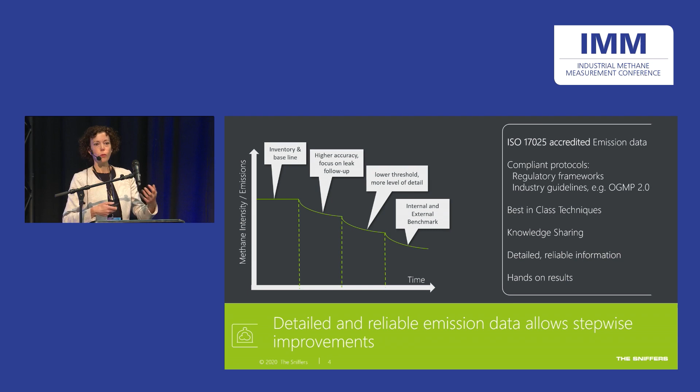And that's also what we see: when companies start to let go, emissions go up again instead of down. So we keep driving results by adding new technologies to the mix, looking for higher accuracy, lowering repair thresholds, and in the end what we also see is that benchmarking and comparing results typically drives long-term results.

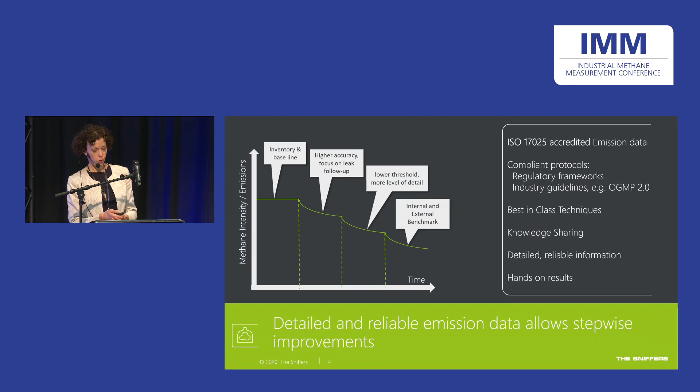So how do we achieve that? I've identified 7 key success factors in long-term results, which means first of all focus on regulations and industry standards that are there.

Luckily, more and more standards and regulations are being developed. So we built a leak detection and repair protocol, a multi-year plan that we incorporate in software. Company targets are incorporated, and we build a plan based on that. Then, as mentioned, the inventory of sources.

Build a measurement scope, meaning defining in detail every year what you are going to measure and when, taking into consideration stops and turnarounds. It's really one program that ticks multiple boxes, but it has to fit. We also see better results if you combine measurement technologies - I'll come back to that later.

And then, of course, it's people. Have dedicated people to perform those measurements and process the results. It's not a side job - if you are committed to reducing emissions, it is really a day-to-day job and you need to focus on it.

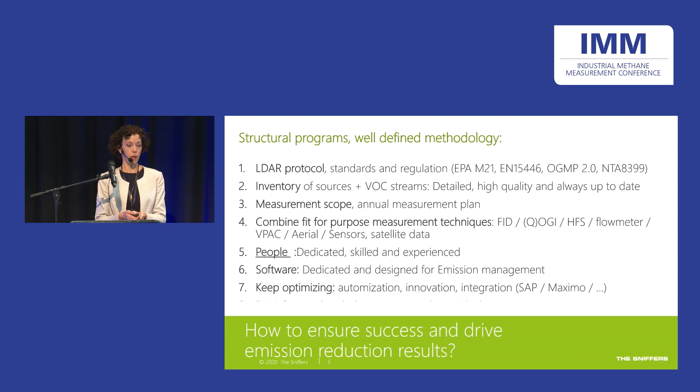And then it's keep optimizing. Emission reduction is not a project, it's not even a program, it's a process. You need to understand it's a multi-year process that you keep improving over time as technologies develop, as software develops, as you integrate more information from different systems, all with one purpose: emission reduction.

So, three basic steps. I'd like to focus now a little bit on the fugitive emission side, but basically these three steps apply to any emission type. The approach is the same.

That means attention in that first preparation phase: identify the sources. We do that by identifying the applicable process streams on the technical drawings, the P&IDs, and building that database with an overview but drill-down capability on a source level. That means each individual component - flange, connection, valve, seal - has its own identity and properties in a database.

Second, the measurements in the field. You choose fit-for-purpose technologies. It doesn't really matter which emission type you measure - vents, flaring, incomplete combustion, or leaks, fugitives - you choose measurement devices that give you the right sensitivity and accuracy you're looking for, based on company targets, protocols, and regulations.

And then lastly, it's of course the result. Make sure the reporting you do is based on measurements and not on general leak rates, because then the results of your efforts in the field are never visible.

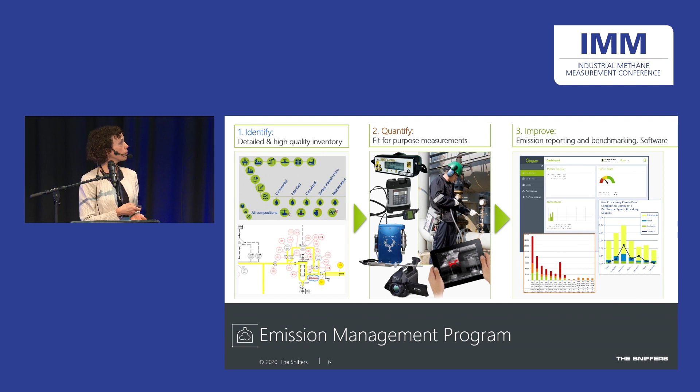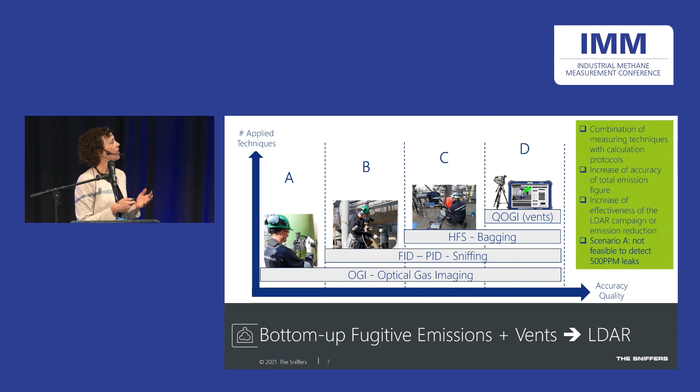So how do we select those equipments, those measurement technologies? What I'd like to demonstrate here - my slide wasn't long enough, I can add an E, F, G, H and go on - the message is it's okay to start out with one technology.

For example, an optical gas imaging camera - you screen and you find leaks, but you're also missing leaks and not finding everything. It's only applicable in certain circumstances.

And if you add other technologies, not just for quantification but also for leak detection - so if you use a camera for leak detection but use another quantification device afterwards, you're still not finding all the leaks. You really need to focus on both leak detection sensitivity and quantification accuracy. Those two things are important.

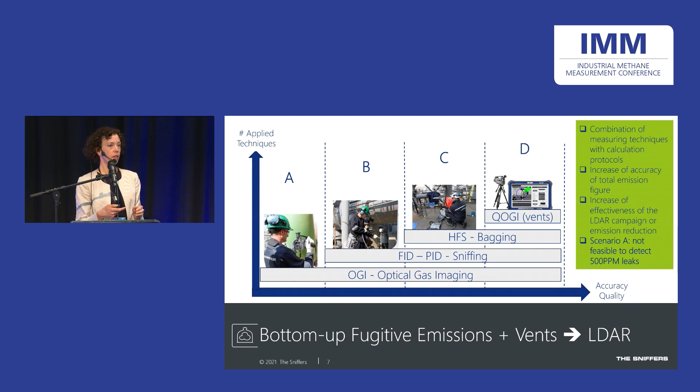I stopped here at D, but there's also aerial-based measurements, fixed sensor technologies, all newer technologies that are not yet processed in the industry protocols and regulations that are there, but they're out there and improving every day. So definitely take those into consideration.

I'd like to focus now on emission calculation based on source measurements. These are the most applied techniques right now for leak detection and repair programs: FID measurements, and we have EPA Method 21, or in Europe the EN 15446 standard, to convert ppm values found in the field into a mass loss in kilogram per year. We do that using factors.

Even with optical gas imaging - if you use a camera, it's not a measurement at all, it's only visible whether a source leaks or doesn't leak - but you can still perform an emission calculation. Initially this is okay, but you also need to understand that your calculation is very inaccurate and that you're also missing leaks. That is the main point.

What we see in our experience is that all of these factors that the industry uses worldwide were not developed for methane, not at all. So we see that they give a large overestimation of fugitive leaks. What we feel the industry needs is a new development of methane-specific correlation factors.

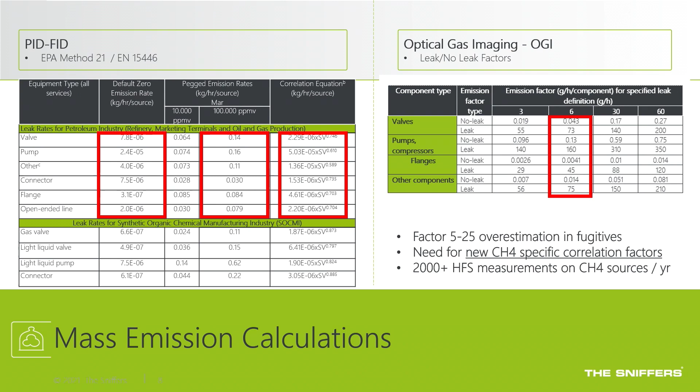Because let's face it, in the field you keep measuring ppms and screening with OGI cameras, but the factors don't match the actual results. And how do we measure the accurate results? With high-flow sampling - we perform thousands of high-flow sampling measurements every year. So we see these deviations, and I'd like to share.

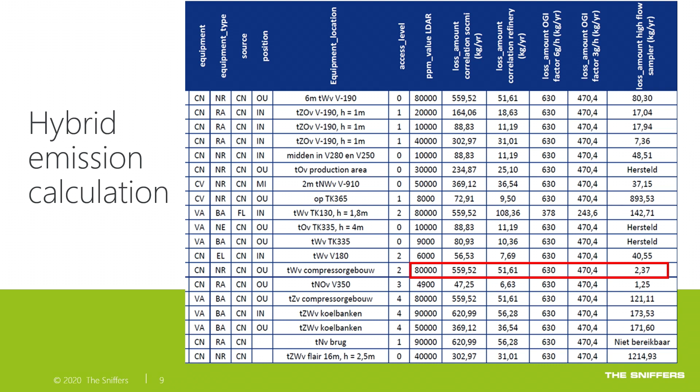These are some typical results where I have indicated the losses calculated with the factors, and in the last column, the actual loss that we measured with bagging the leak, which means measuring directly what's coming out of a leak. You see here the big differences. These are not really exceptions. In 85% of the cases, it's an overestimation between a factor 5 and 25 in the end result. So definitely something to consider.

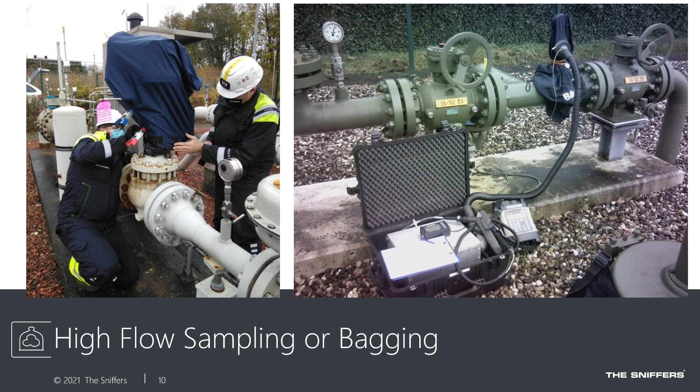Here you see some examples of what the bagging looks like. So you actually wrap an equipment, measure the flow and concentration, and you know the molecular mass, temperature, and you calculate the actual loss.

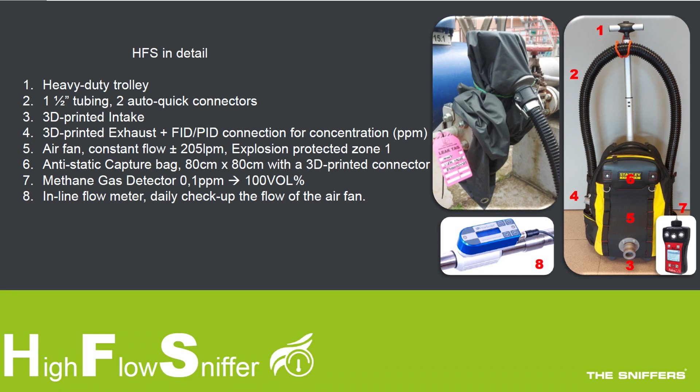So for that purpose, we have built our own high-flow sampler. The original one was developed in the early 80s or 90s, a long time ago when I was young, and the device was discontinued. Right now there are several of these new bagging devices on the market. We really needed them, so we decided a couple of years back to build our own. It's based on more modern technology, so connectivity with software, again having an audit trail so that you can trace back every measurement to the original source.

How do we build a measurement scope and a measurement plan? How do we mix those technologies and make sure that we know what we are going to measure every year? So this is an example of what we've been doing a lot in the past years.

Initially we start out with 100% inventory of sources. And an inventory is not an inventory - it can be done in 100 different ways with a lot of granularity and eye for detail, incorporating properties of each source, even the brand of a valve, to monitor performance over time, etc. You can do this in many ways, in the field, but also based on the P&IDs, on the technical drawings. And depending on how up-to-date all the information is, that also defines how accurate and up-to-date your database will be.

Sometimes in parts of the world, technical drawings are not even available, so you need to go in the field and take pictures of each equipment and add numbers. It can be a lot of work, but it's also something that we've optimized and automated, so it can be fairly quick and accurate at the same time, depending on the information that's available.

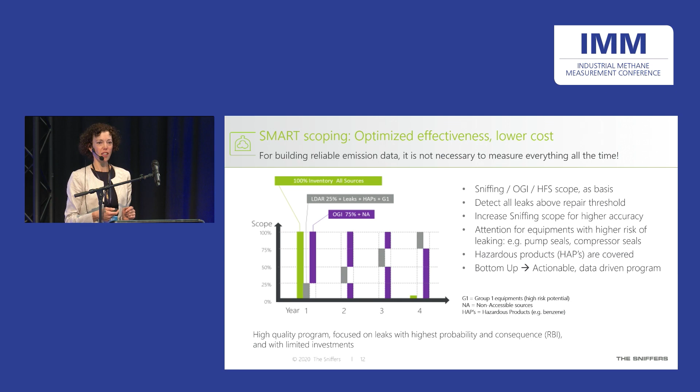If it's a big installation, you can divide the installation in units. But in our gas transporting and distribution network, we also have thousands of small installations. There we measure a part of the installations and we develop a specific emission factor, for example for a typical kind of well site or a typical kind of valve station or metering station, and we extrapolate those results over the parts that we don't measure, but screen with the camera. So in that way, we develop a multi-year plan.

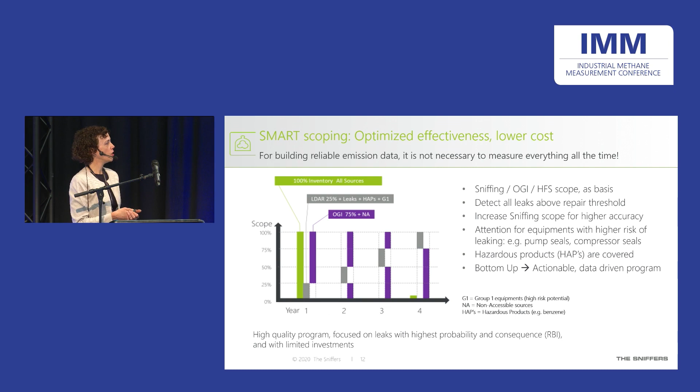To manage all that, we have developed a software, grown over the past years. We started out with software to manage our own data as a service provider, and right now it's a tool that we also offer to companies to manage all emissions - not only fugitives, but because you can calculate emissions based on factors, direct measurements, indirect measurements, source-based and site level, you can build your total emission number based on this hybrid calculation. It's also a tool to track leaks, monitor targets, and have more detailed insight.

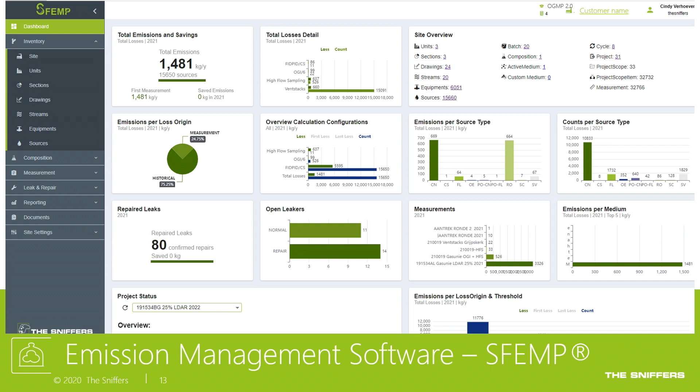I see my time is up, so that's basically all I wanted to share with you. And I believe a question session is after 4 speakers. Thank you.

Right, how are we on audio, folks? Good stuff. Oh, we've jumped on several slides already. Oh right, you get the sneak preview. There we go, okay.

The rate of change in this subject is quite remarkable. If you look at where we were the last time this conference met face to face, the topic of conversation was really, why should we reconcile methane data? In the time it's taken us to have one small pandemic, we've gone from why should we be reconciling data and doing this extra work into how can we take these measurements and technologies that fulfill this part of industry expectation and regulatory requirements, into what is actually the important thing, which is what is this data telling us and what can we do with it?

Because when we're talking about reconciliation, yes, it is important that we are taking these measurements to improve the quality of what we report, be it to our regulators or other stakeholders. But it's more important than that. The question is not just the quality of the reporting, but how can we use that information to manage our emissions more effectively, and in the case of methane, bring those emissions down. And...

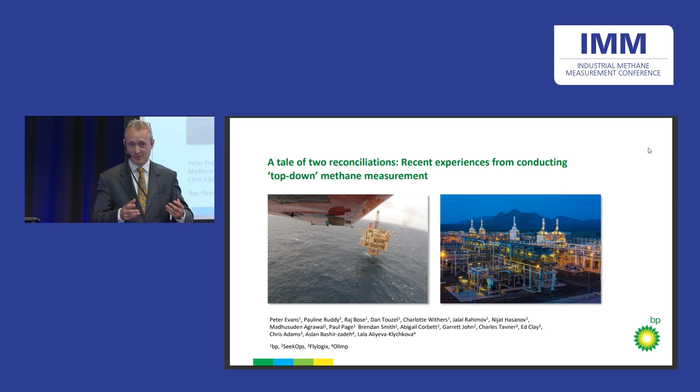In that spirit of transparency, what I'd like to do is present two quite different results from two of BP's operated assets, about as different as you can get among the ones we own and operate. One is Clair Phase 1, to the west of Shetland in the cold, dark waters of the North Sea, offshore of course. The second is a large gas processing site called Sangachal, on the banks of the Caspian in Azerbaijan, managing the sum total of all the oil and gas BP produces in the Caspian and exporting that into Europe. In the climate we live in, this is one of the main arterial routes of gas into Europe, so the emissions from these facilities really matter, and managing these facilities really matters.

For the purposes of reconciliation, these are single standalone units. They can be considered as populations of one, and we need to reconcile them at the individual asset level. That reconciliation is only as good as the reported data that goes into that level 4 measurement in the first instance. We start with understanding what is actually coming from these facilities. If you look at the emissions as we understand them today, the vast majority of methane escaping to atmosphere is actually coming from processes - from flares, and from combustion sources. For these sites, the fugitive emissions are a relatively small percentage.

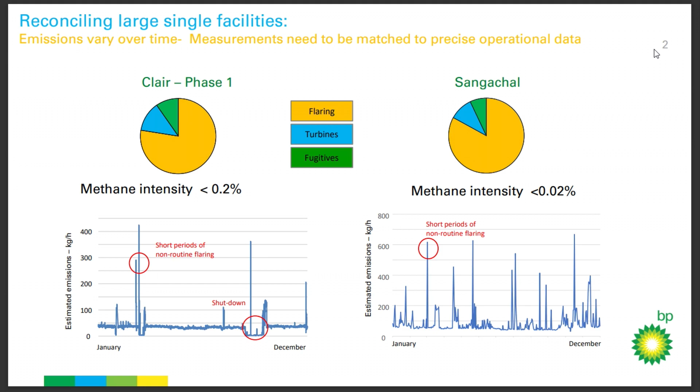That matters because when you look at what happens on these sites, the emissions change by orders of magnitude over the course of the year. If a piece of equipment suddenly trips and you go into a flaring situation, the emissions can be 10, 100 times larger than at steady state. What is also interesting is when you look at the split of these emissions - these are very different facilities, but the relative proportions are roughly the same. The methane intensity, though, is quite different - there's an order of magnitude difference between Clair, which is mostly an oil-producing facility and doesn't produce much gas, and Sangachal, which is predominantly a gas-producing facility. So when we're talking about methane intensity as well, these are very different sites in terms of the total amount of methane passing through them.

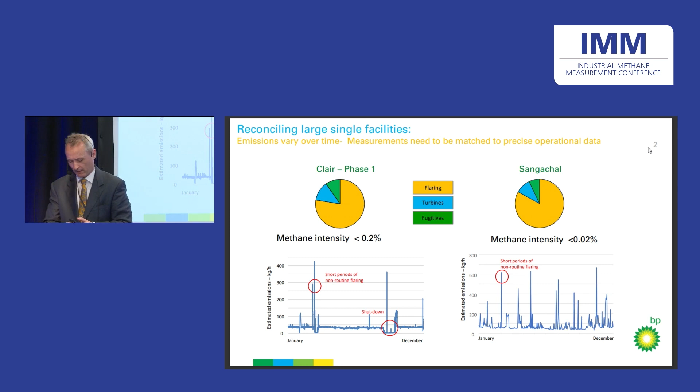So how are we taking these actual measurements? Well, Stefan Schwietzke yesterday gave an insight into part of this technology, and colleagues from SeekOps will be talking about some of this later on today as well, that in an offshore setting, the principal technique we are deploying is putting a spectrometer on an autonomous aircraft. I don't like calling them drones because they're a little bit more intelligent than that. They're managing their own flight path and managing their orbits around the facility.

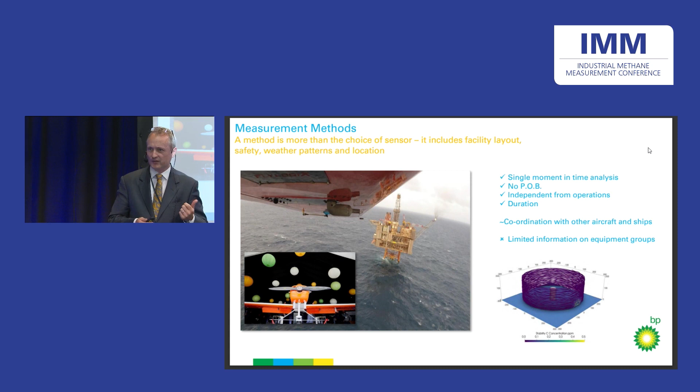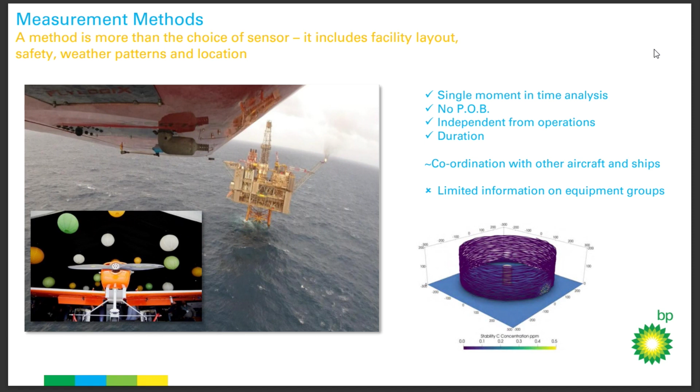The benefit of this kind of technology is twofold. From an operator's point of view, we're not putting a person on board, we're not sending people out in aircraft routinely, and we are limiting the number of people transiting between sites. So from an operational point of view, there are advantages. But also from a data management point of view and a reconciliation question, it is increasing the independence - that measurement is not being conducted in close communication with the asset. It's being managed independently of what's happening on that site at the time. The downside is you have reduced levels of spatial resolution because you're taking everything from the facility simultaneously.

Onshore is a different situation. These are much bigger sites. Sangachal is about 2 kilometers long. And that's compounded by the fact that the site has very complex wind patterns, where you've got the Caspian to one side, mountains to the other. So the wind patterns are changing almost on a minute-by-minute basis. The most practical way to get measurements for these sites is then to break them down into large operational parts of that site and take measurements therein, and then combine that data into a composite figure.

And that's akin to this sort of functional elements type idea that the guys from the National Physical Laboratory were talking about yesterday. It manages that type of environment better, but you have a more complex challenge then of coming up with this composite value, which is the sum of all the different emissions at slightly different times from different parts of the site.

So let's get to the stuff that people really care about. What are the results actually telling us? Well, here's the example from Clair, and we have the reported value, which is based upon the measured flow rates of gases through the system combined with emission factors, and it comes in at somewhere around 20 kilos an hour. It's worth bearing in mind that in a global context, 20 kilos an hour is a very small amount of methane.

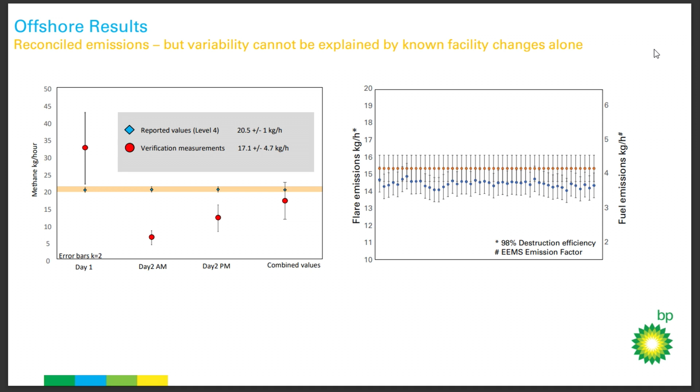But we have to go deeper. This is a process of inquiry. It's not a case of ticking a box to say that we are happy that everything's fine on Clair. What do we need to do to understand our emissions better beyond that point? In this instance, because it's mostly process data driven, we can pull that information from our data management and look at exactly how much gas was going up the flare, how much gas was being used for power generation. In the case of Clair, at that moment in time, everything was steady state.

The flare was running at a constant rate. We weren't switching between turbines. And so there is something in the data that we cannot explain that might account for some of the greater variation we see between the two data points. The important thing here is that the top-down method is not better, it is different. The purpose is having two different techniques that you're comparing and using that to drive that process of inquiry.

And what that takes us to means that we're probably going to have to understand the top-down technique even better. We've done a number of controlled release experiments to understand the method of the technique, but there are steps further that we probably should go.

It also highlights the importance of knowing exactly what's happening on your flare, exactly what's happening on your turbines at that precise moment in time. The emission factors that we currently apply to these components are the rate-determining step in terms of understanding emissions from those important bits of equipment. That's why, like Jan Sandvik who's talking later today, we're putting in methodologies for the level 4 part of the equation, so we can look at a minute-by-minute variation of exactly what emissions are coming out of those pieces of equipment.

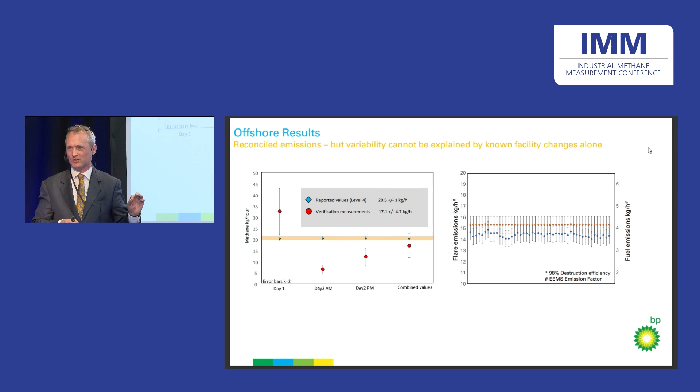Sangershall is a slightly more complex case. When you look at the total emissions we would have reported for that site during the period of study, it would come in at roughly 230 kilos an hour. For the size of the site and the amount of gas it's managing, that is a very small amount of methane. The verification figure, the level 5 measurement, comes in with a statistically insignificant difference — 267 kilos an hour. The two numbers are basically the same.

At a very superficial value, you would then say the requirements of OGMP have been satisfied — we have two numbers that are reconciled, the site is reporting accurately. But when you look at the detail of where those sources are coming from, there is a material difference in what's actually contributing. So relative over-reporting in the flaring, in this case, is being offset by relative under-reporting in some of the combustion sources. That's because we found one of the heaters on the site needed maintenance, which allowed us to intervene and materially change the emissions as well as improve the quality of reporting from the site.

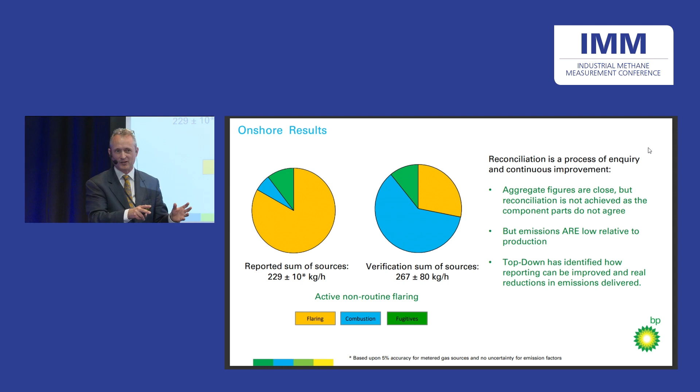Managing all of that contextual data is arguably as important in some cases as managing the headline figures coming off the measurement units. So reconciliation is an important part of the reduction process — it's so much more than just basic reporting. It's driving our operations to where they're going to have the most impact. Where should we be putting resources into managing our emissions more effectively?

You have to have high quality data. You have to have good quality bottom-up data from all the different systems which have a material impact on your emissions — really good data on the flares, really good data on the combustion sources. And as we understand them better, we'll probably be having to get more into the fugitive space again and understand that more.

It highlights the importance of the need to interrogate the method and the results. As I said, the top-down and bottom-up techniques are not better or worse — they are independent. And it's the power of that independence that drives the changes that we need.

The big challenge to the IMEO then is how do you amalgamate results from different operators using very different methodologies to derive the results. I know I'm a stuck record on this, but the best way we can get after that is having clear standards for measurements, so that regulators, as they stand up, know what they're getting without having to have detailed conversations with us about each and every measurement we've taken.

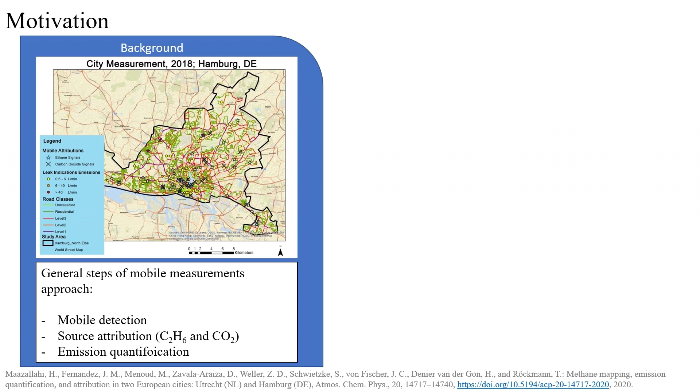But then some of the locations had really high emission rates, so we had discussions with the suction team. Suction teams perform measurements in Germany and provide data to the national inventory in the country. We had a couple of meetings and discussed why there were some locations with really high measurements from the mobile technique. So we designed a campaign again in Hamburg and performed the techniques at the same locations with mobile method, suction method, and tracer method as an independent technique with lower uncertainty.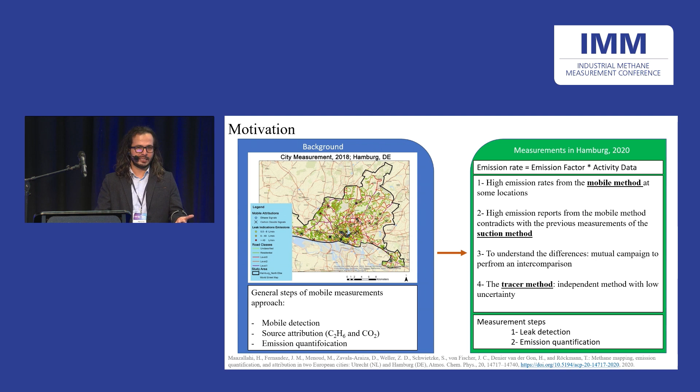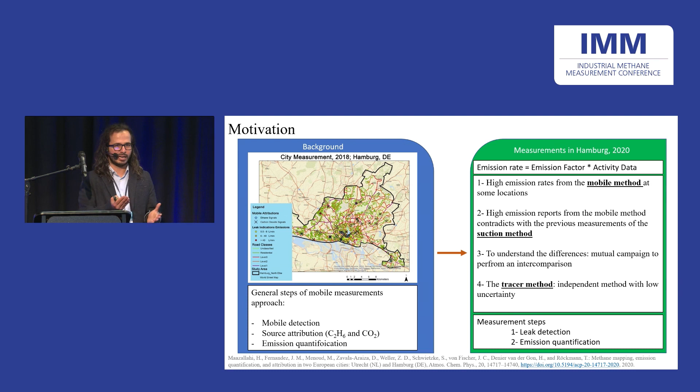The first step to accomplish this campaign was to perform leak detection. To find the leaks, we performed two methods: leak detection from the mobile method, and leak detection and confirmation from the carpet method. The carpet method is where people go on top of the pipelines with a map, and it's performed by the gas utilities.

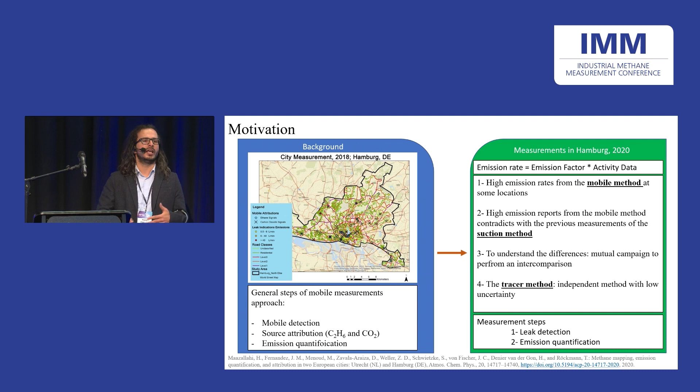Then when we have the locations, we perform the techniques, the mobile method, suction method, and tracer method, and then we have results to compare the quantifications.

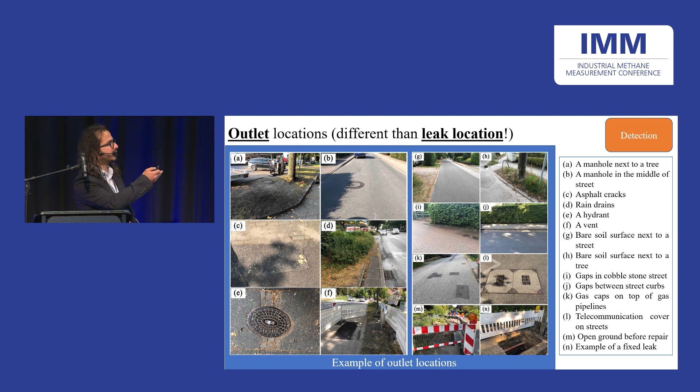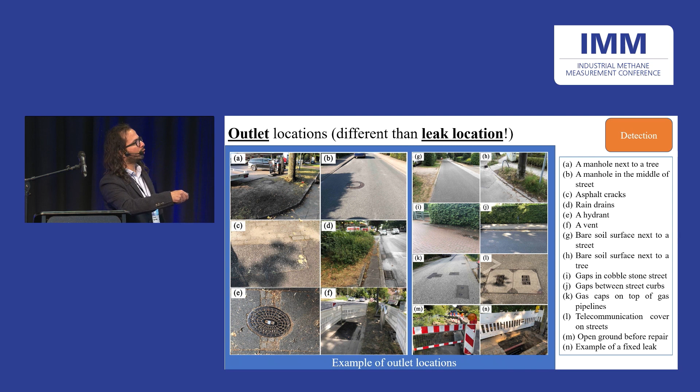When we perform the measurements, we notice that the emissions come from outlets, which can be any of these outlets in the city. They can be from manholes next to a tree, or from the soil, or a manhole in the middle of the street, or from the side of the street, or again next to a tree, or from cracks on the curbs next to trees, or from cracks between the cobblestones, from rain drains, cracks in asphalt, hydrant caps, or vents—there are some vents in the city.

The emissions from a leak on the pipeline can come from the vents, or from telecommunication covers or gas caps. This one is an example where the company dug at the location to repair the leak, and this one is one of the locations which was repaired.

So emissions occur on a pipeline, on a leak at location A, but it comes out of the ground at location B. Location A is the leak location, and location B is the outlet location. This is a difference that we need to be careful about. We're going to talk about it.

Once the mobile method got the indication that there is a leak in this neighborhood, then the carpet method performed their technique and applied drilling. They drilled and measured the concentration, then mapped the concentration, and the leak was boxed in between the highest concentrations. So the leak was here—this is one of the locations.

Once we know the leak, then the suction method—this is important—because they have to put their probes around the leak location. So we have the leak indication from the mobile method, and confirmation comes from the carpet method.

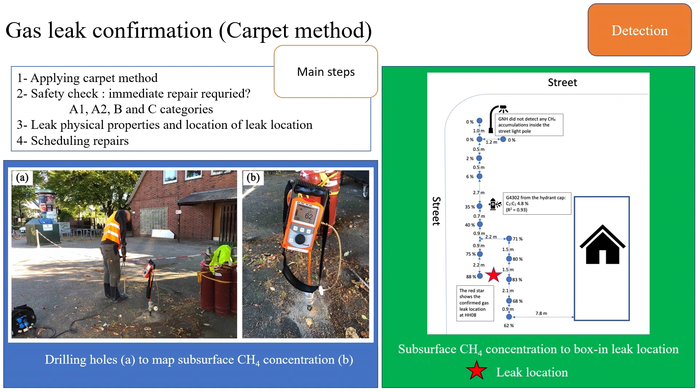Once they have the leak, they categorize it into A1, A2, B, and C. A1 should be repaired immediately, A2 within one week, B within 3 months, and C depending on the repair plans.

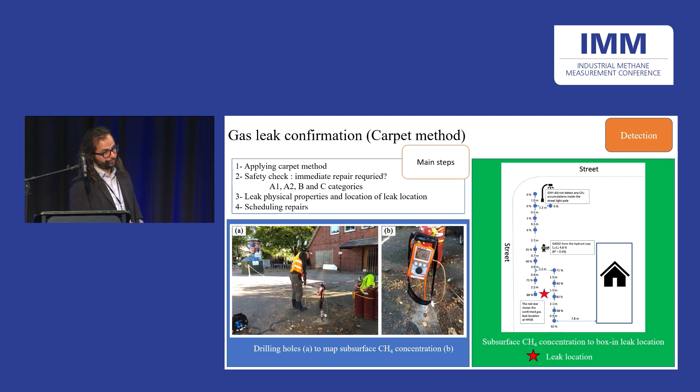So we have a basket with the locations. In this campaign, we got 20 locations: 15 were initially detected from the mobile method, 13 of those were confirmed as gas leak locations, and 5 locations were reported from the gas utility. But those 5 locations should be from categories B and C, because A1 and A2 should be repaired either immediately or within 1 week—so there is not enough time to perform the quantification.

In the mobile method, we had two instruments, Picarro G2301 and G4302. Together they gave us measurements of methane, ethane, and CO2. The inlet was from the front bumper, the same inlet. We performed detection, attribution, and quantification, and performed transects as many as possible at different locations.

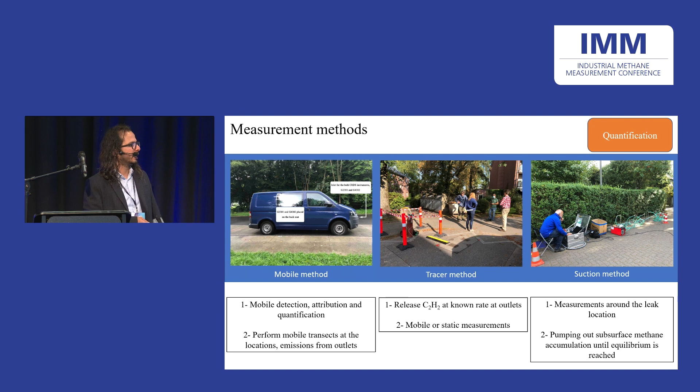So this is the result from the mobile method. We had 20 locations from HH1 to HH15 initially detected from the mobile method and confirmed from carpet method, and then 100 to 104. These are reported from the gas utility. So these locations were only in B and C category, where repair could be done in 3 months or within a repair schedule of the gas utility.

But then most of the locations in this red box were among the A1 and A2 categories. This means that these locations should have been fixed either immediately or within 1 week.

And you can see, like in the mobile method, there is a difference between these two categories. So in the mobile method, we have a cutoff, and this cutoff is 10% of a methane background. If we consider 2 ppm methane background, so this is 0.2 ppm. So every signal we get less than that is considered as a red dot, and we don't see them.

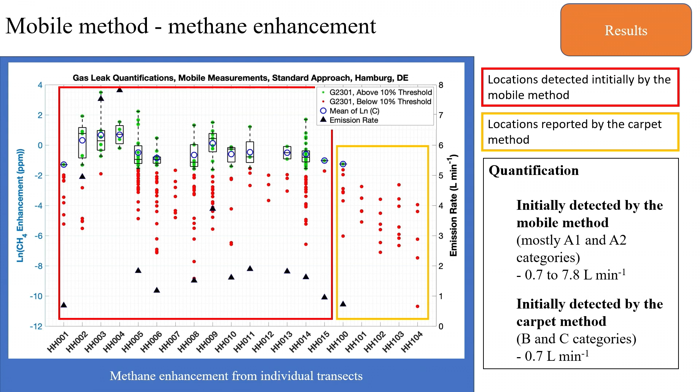And then we get quantification. The quantification from the mobile method for this category is between 0.7 to 7.8 liters per minute. And in the other category, which could only be quantified, one of the locations was only 0.7 liter per minute. So there is a big difference between these two categories.

And then tracer methods were performed at the locations, and you can see in A1 and A2 categories, the emission rate were capped to almost 5 liters per minute. And then in the other category, they were maximum 0.14 liter per minute. So there is a difference between these two categories.

At some of the locations, we faced really large subsurface accumulation. So when there is a really large subsurface accumulation, it means that the suction team has to pump air out of the ground for hours and hours. And if the leak is within the A1 and A2 category, it means there is not enough time to perform the measurements, because the leak should be fixed immediately or within 1 week.

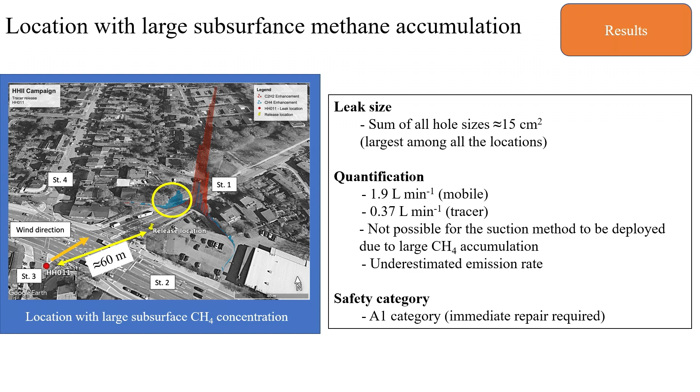So for this location, we performed the mobile measurements on the streets, and then we got some signals in this area. We checked the outlets, and this outlet here showed really good signals that this could be close to the leak location. And there was some signs that there was a pipeline here. So we performed the quantification, and then we released acetylene at this location, assuming that the leak was really close to this location. But then once the carpet method were applied from the utility, they didn't find any leaks here.

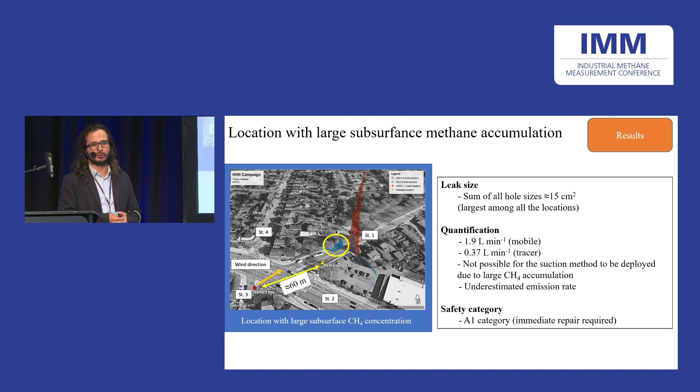They found the leak 60 meters away, south of the street. And this is important - it means that the accumulation has a minimum radius of 60 meters. And this is way too much to pump out air out of the ground within an allocated time for the suction team. So for this location, the mobile method reported 1.9 liters per minute, tracer method almost 0.4 liters per minute, and the suction method didn't have time to perform the measurements. And this leak was categorized in A1 category, so it should be fixed immediately.

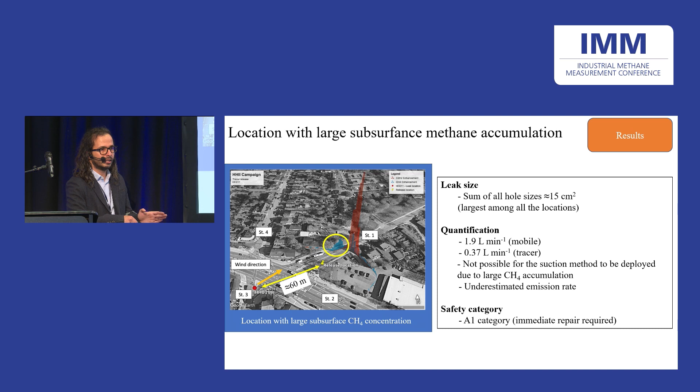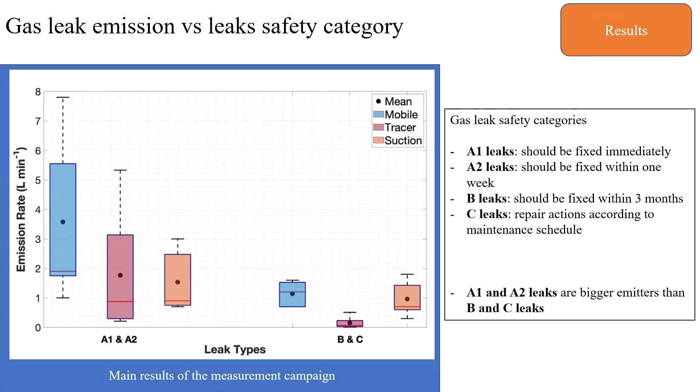And this is important because A1 and A2 categories, if they are bigger emitters, they should be fixed immediately. And the suction team, which is responsible to report emissions to the emission inventory in Germany, measured mostly B and C leaks. This means that there is a low bias in emission reporting in Germany.

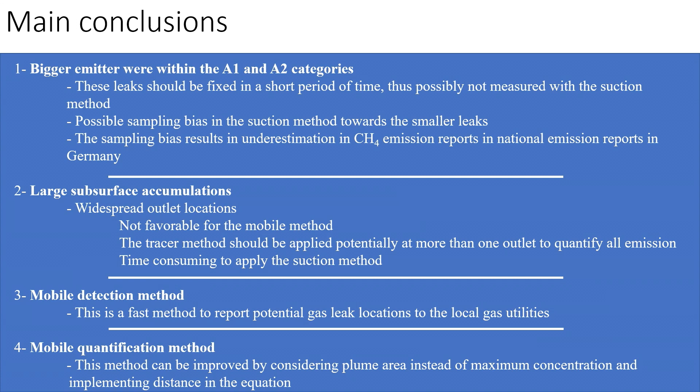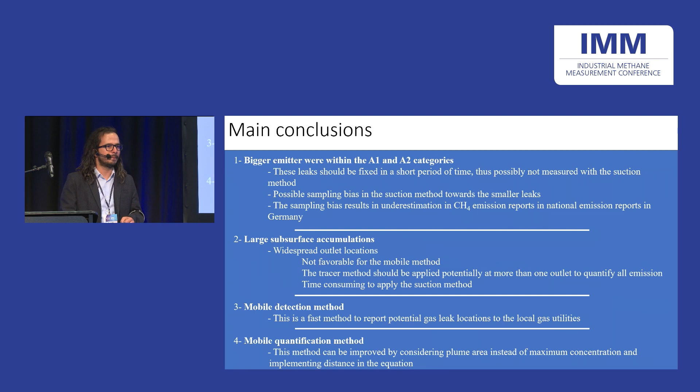Number two, we faced a location with a really large subsurface accumulation. This is not really favorable for the mobile method, because there are different outlets, like 60 meters away, 10 meters away, 20 meters away, and the mobile method gets the different signals separated from each other. The mobile method can report more than one leak, although there was only one leak. This is also not favorable for the tracer method.

It also depends on the location, because if it is a really large subsurface accumulation and the outlets are really far away from each other, the tracer method should be applied at different locations to simulate the emission. This is also not favorable for the suction team, because they need hours and hours to pump all the air out of the ground, and it is not practical to measure these types of leaks.

Mobile detection method is fast. You just get signals, and then you know the neighborhood where the leak can sit around, and then you report the location to the gas utility, and the leak can be found.

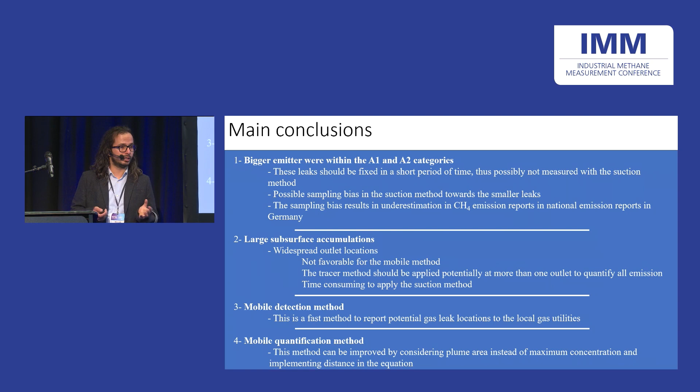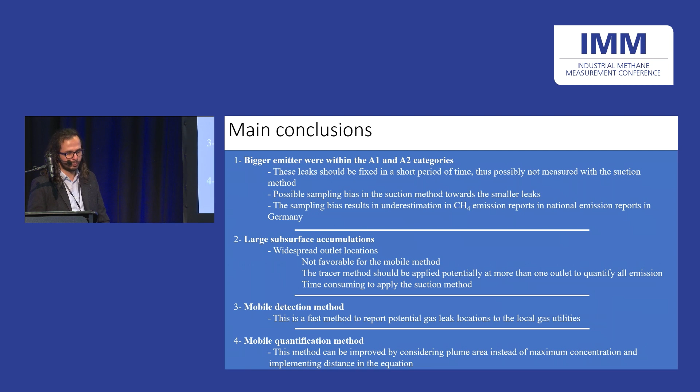But for the quantification, the quantification method can be improved, because in the mobile method quantification we use the maximum enhancement, and this maximum enhancement can be replaced by the plume area. Then the quantification method is not dependent on the instrument. And considering distance in the equation can improve the mobile measurement method.

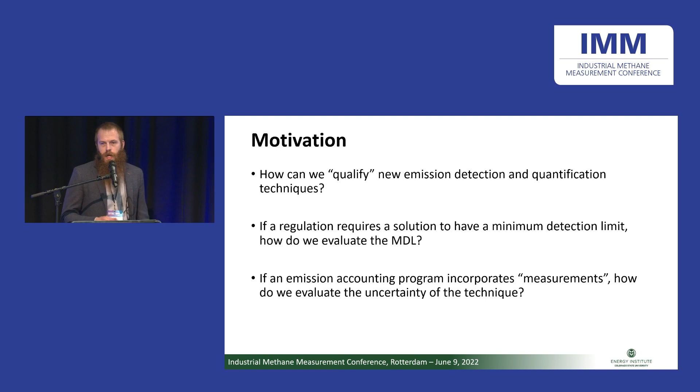This work that I'm going to present today is motivated by three key questions. The first is, how do we qualify solutions for some of these new programs and reporting standards? How do we evaluate the detection limits of those solutions and methods? And how do we understand the uncertainty with measurements made by these different solutions? So the work is part of the ADED project at CSU, which is aimed at developing transportable controlled testing protocols and demonstrating if the controlled test results are actually reflective or indicative of field performance.

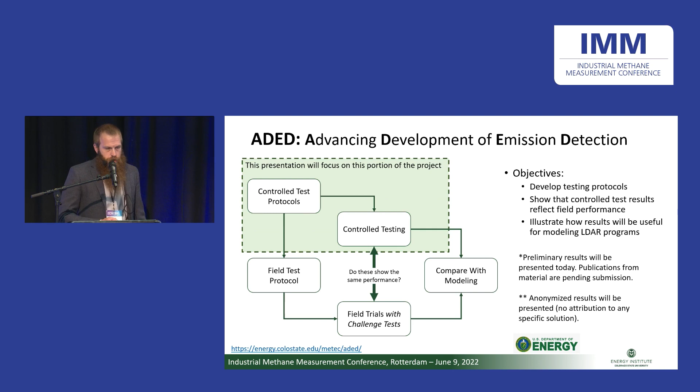Today I'm going to focus mostly on just the test protocols, and the fieldwork side is in progress this year. When we discuss testing solutions, I keep referring to them as solutions, not methods and not technologies, because we're really looking at the combination of a sensor, how it's deployed and used, and the analytics. The analytics are a key component of a solution, since generally what we're interested in is outputs like a detection, an attribution of that detection, and a quantification estimate - kilograms an hour - as opposed to a raw sensor reading like a ppm measurement.

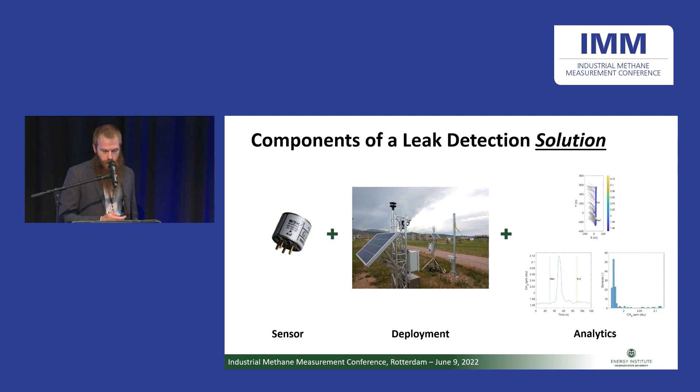For some context, I wanted to introduce how many of these new solutions are working. Most of my work's been done for me by other people at the conference who already discussed this a fair bit, so we'll keep it quick. But one key difference is that the traditional methods like OGI and Method 21 are really up close and personal with the emission sources, and a lot of these new approaches for measurement are typically measuring the emissions after some dispersion and some transport has occurred.

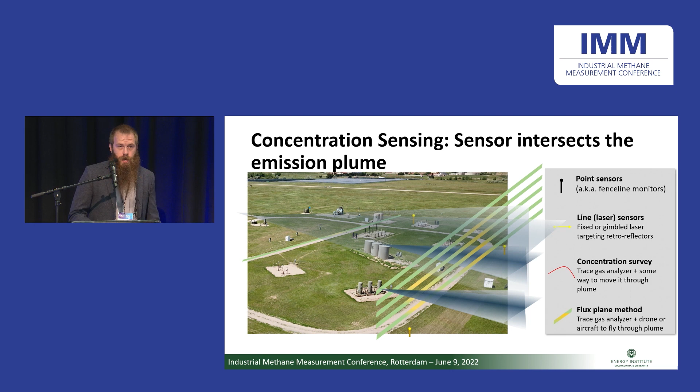So we're generally seeing kind of two types of solutions out there. The first is really making in situ measurements - they're measuring the concentration, and that requires the sensor to physically intersect the plume or an open path sensor to transect the plume. Examples are point sensors surrounding the site and downwind, line-based sensors shooting out towards retroreflectors at fixed positions, concentration sensors driven around in mobile labs, and different aerial approaches like the flux plane approach described by several of the drone solutions, or modified ones for scientific aviation spirals and the like.

The other type we're seeing a lot of is sort of scanning or imaging techniques. These are basically different because you're set back a little bit further than traditional OGI techniques, but in general you're generating a 2D or 3D map of the plume by scanning.

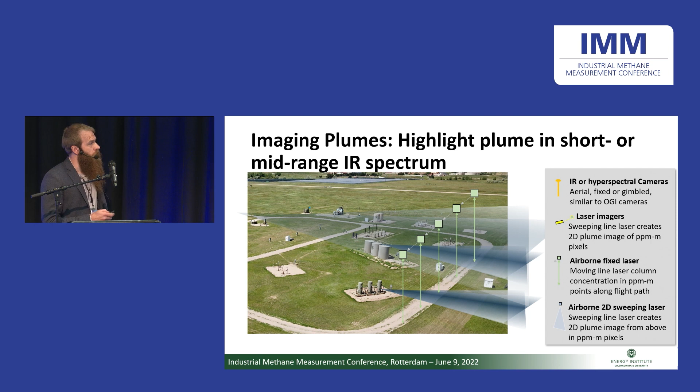Examples can be an IR camera or a hyperspectral camera on a pedestal, or a sweeping laser absorption technique, where an instrument scans an open path sensor and produces a map or image rapidly of the plume. Or many airborne techniques, like a drone shooting a laser at the ground, measuring the absorption in a column underneath it, performing a screen that way, making sort of a flux plane approach, or a scanning LiDAR technique similar to what Bridger Photonics uses, or imaging like Kairos Aerospace from above in the air.

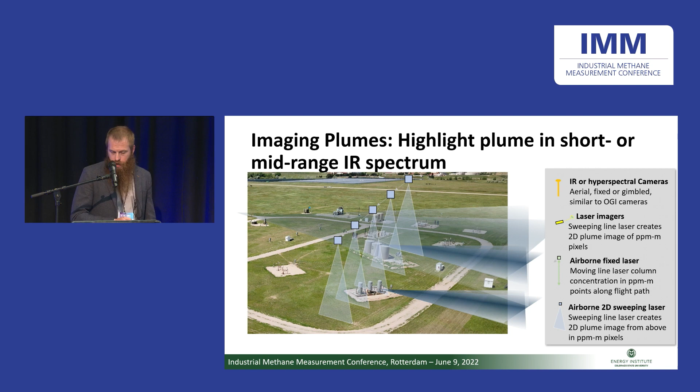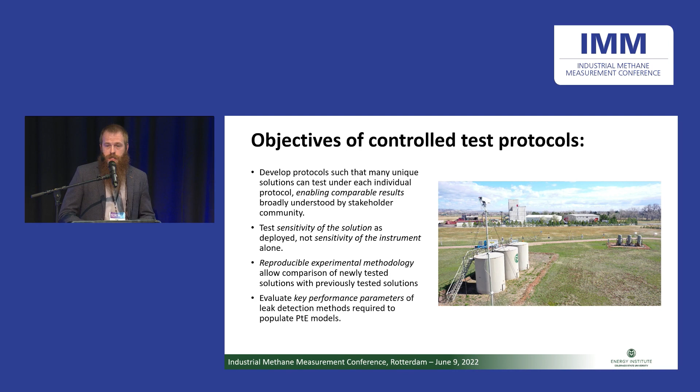When setting up protocols for testing these things, we're really looking for a couple things. There's a wide variety of approaches, and we want to define a test protocol that enables many of these different unique solutions to be tested under similar, comparable protocols. We want to do that in a repeatable manner, and we want to focus on the outputs of the solution, not the sensor. Finally, we want to put together metrics, a way to compare method A versus method B, the quantification estimate from one versus the other. We want to evaluate and establish metrics that enable these comparisons.

At a high level, the testing is conducted single blind. The performers don't know the locations of the releases, they don't know the emission rates, and they don't know how many sources are there. That's all blinded information.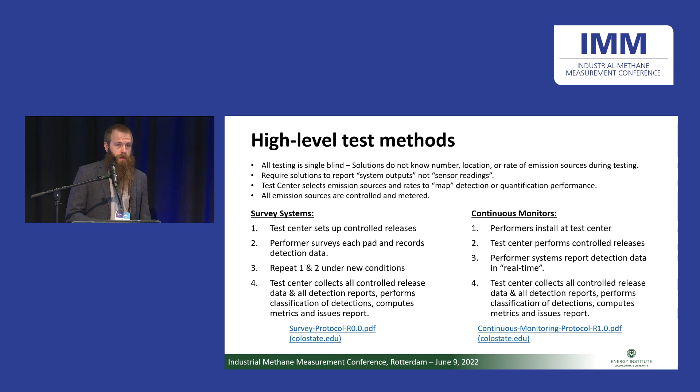In general, the test center selects the emission characteristics to map out the performance metric we're interested in. This can be tailored to look at detection limits by running smaller sources, or quantification accuracy over a wider range of emission sources. The testing requires solutions to report data to us, and it reports system outputs, not sensor readings. We're looking for attribution and a quantification estimate. Then basically the test center produces an analysis of those results.

The primary metric that we're looking at has been the probability of detection curve. This basically indicates the likelihood that a solution is going to be able to detect an emission source of a given characteristic. In this case, it's emission rate on the x-axis, but we can look at other x-axes or normalize it by something like the wind speed or other variables.

To produce this, we basically plot the false negative results, so missed controlled releases, and the true positive results, so found controlled releases, on the 0 and 1 mark. We run a binomial, usually logit regression, to produce the fit to that shape. This gives you an idea of what the likelihood at any given emission rate is going to be. Then we bootstrap that result to produce a visual indication of the uncertainty.

In this example, the curve tells us that this solution would find about 9 out of 10 emission sources that have an emission rate of 2 kilograms an hour. By looking at the uncertainty, if we were to go to the field, we would expect this solution may find 10 out of 10, or it may find 7 out of 10 sources of that size that would be present, based on other parameters that may affect that detection.

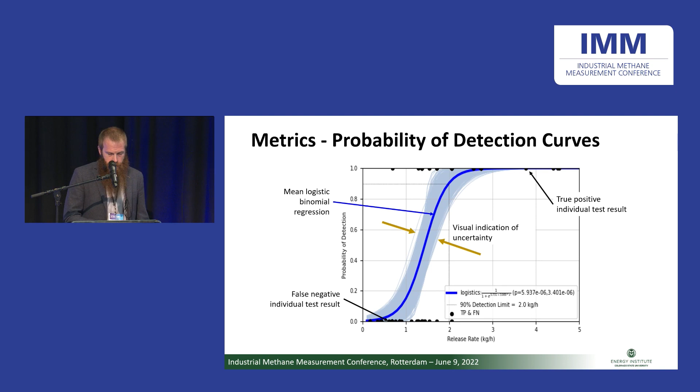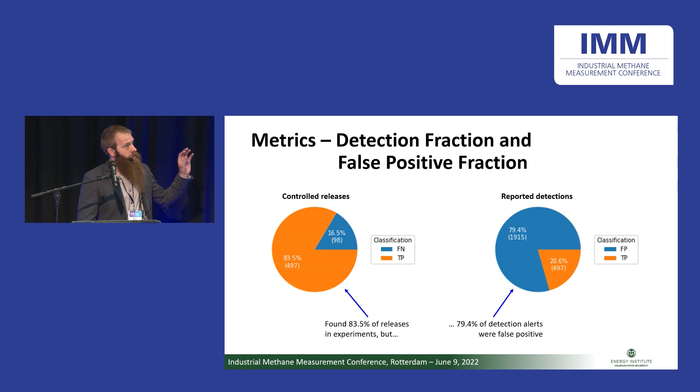When we look at detection and we're looking at solutions, the last figure showed true positive and false negative results - those are controlled releases. We can also classify the detection reports sent in by folks as true positive, so they found the source, or a false positive, where they reported something was there when we had no controlled release running.

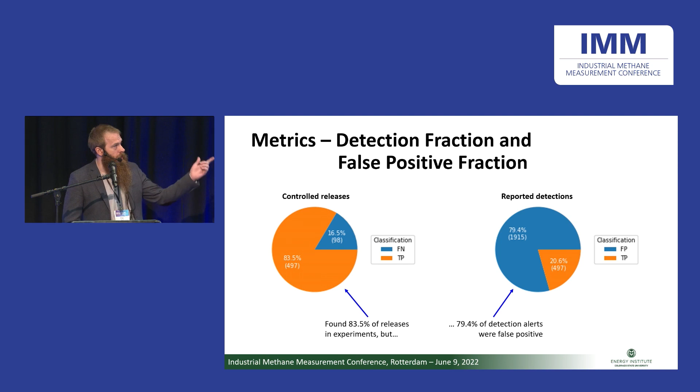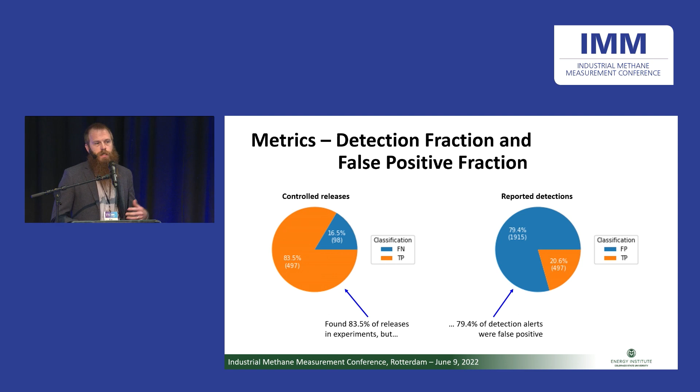This is important and highlights the importance of evaluating the solution, because a solution can potentially do really well with the thresholds turned way down low, so they're basically reporting everything they think they see, but that may result in a high number of false positives. Typically, if you're going to deploy and test, a solution is going to have tuned those set points using ROC analysis or something like that to minimize the number of false positives while still producing an acceptable level of detection. Now, if they produce a quantification estimate, we can also look at the accuracy of those estimates.

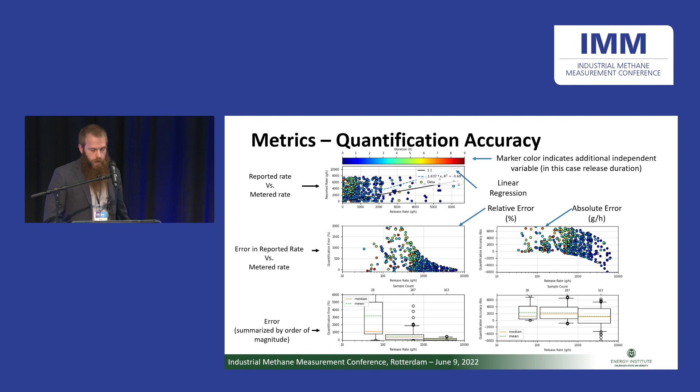We can look at those in terms of a relative error compared to the controlled release rate, or an absolute error, so how many grams per hour or kilograms an hour they were off. We can start binning that data and producing box plots to look at how the error changes over different ranges of release rates, under different wind conditions, different distances for the measurement, et cetera.

On the top, we can also run a linear regression through those estimates. This one shows a bias high of about 60%. You have to be really careful with linear regression because we're often seeing heteroscedastic results, where the error is not independent of the emission rate. So linear regression can be misleading in that case.

Now, if they produce a GPS coordinate and kind of localization, or a bounding box of coordinates, we can look at the accuracy of that location estimate as well as the precision of the bounding box that they're in.

So now let's jump into some results. We've applied this to over 15 different solutions, including continuous monitors and survey techniques.

Up here, we can see the detection curves from several different solutions. The two on the left are continuous monitoring. The one on the right is an aircraft survey technique. The emission rates during the testing of the continuous monitors, we went up to about 180 liters a minute. Unfortunately, that was restricted based on our test site's capacity and capabilities, and we didn't quite go high enough for these solutions to reach a 90% detection rate.

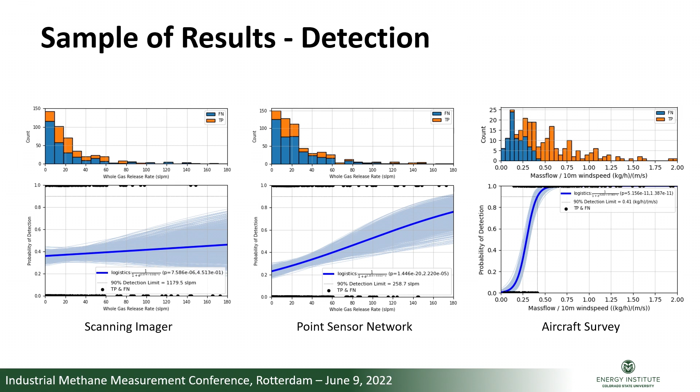Now, over on the right, I've normalized the release rate by the wind speed during that particular pass of the aircraft. In this one, we had a much better idea of where that detection level was going to fall, and we focused our testing there. You can see that we got a really nice result with a high degree of confidence in where that detection limit's going to fall.

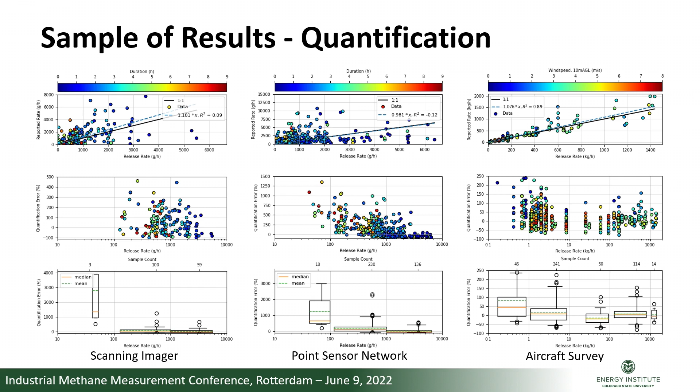I think none of this would be complete without discussing the limitations and caveats of controlled testing. First, not all publicly released test results are single blind, so you've got to be careful about that. Second, any of these results are going to be constrained to the environmental conditions encountered during the test, and the facility type or complexity of the experiments—did you run multiple releases? Were there combustion sources present? How large is the facility?

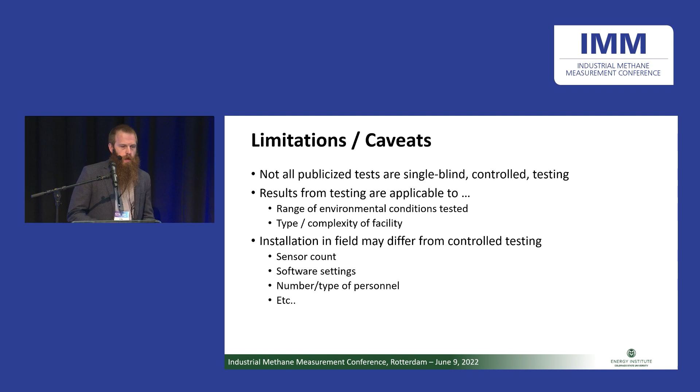It's also limited by differences and deviations in the deployment of the sensor—how many sensors were deployed, what was the average distance of them from the sources, and what were the settings in the software and their black box analytics, et cetera.

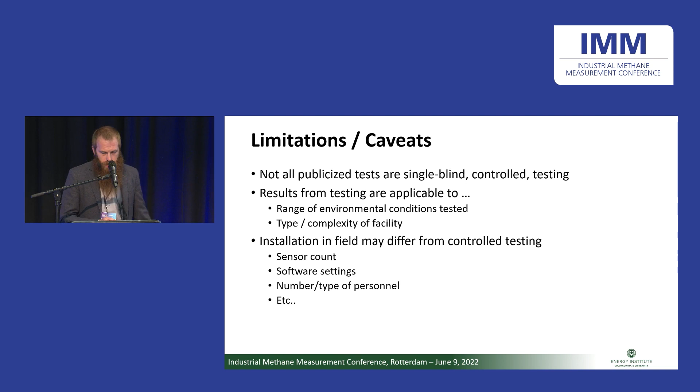So in conclusion, I think establishing metrics first, and then protocols to evaluate those, is a first step towards standardization of some sort—a way toward regulatory acceptance, or acceptance of measurements made by these techniques in new programs like the OGMP.